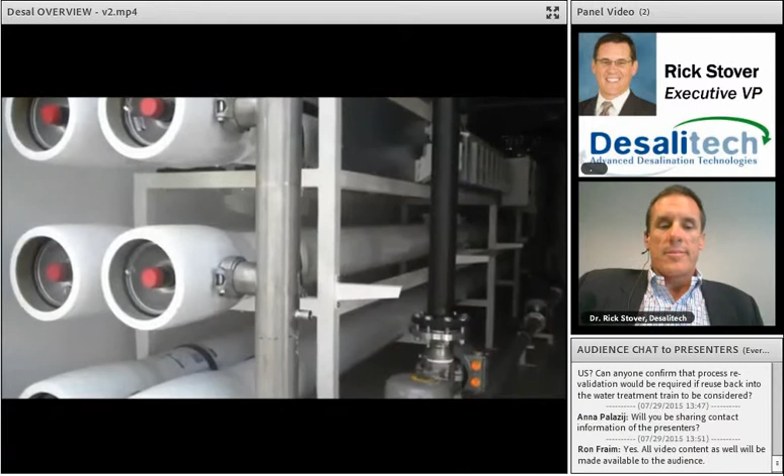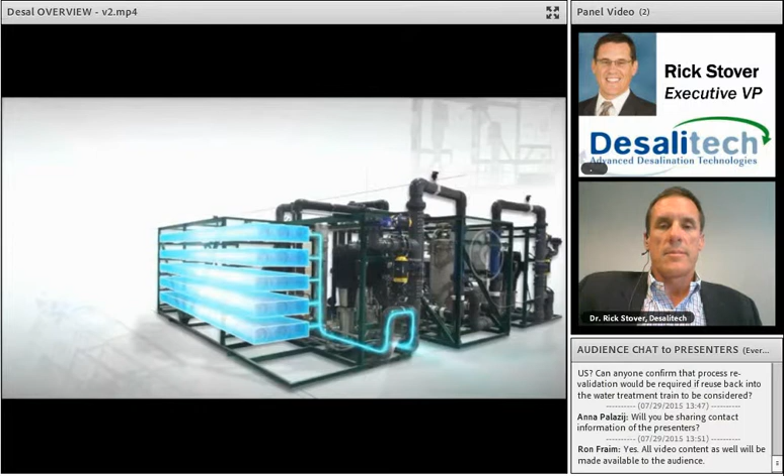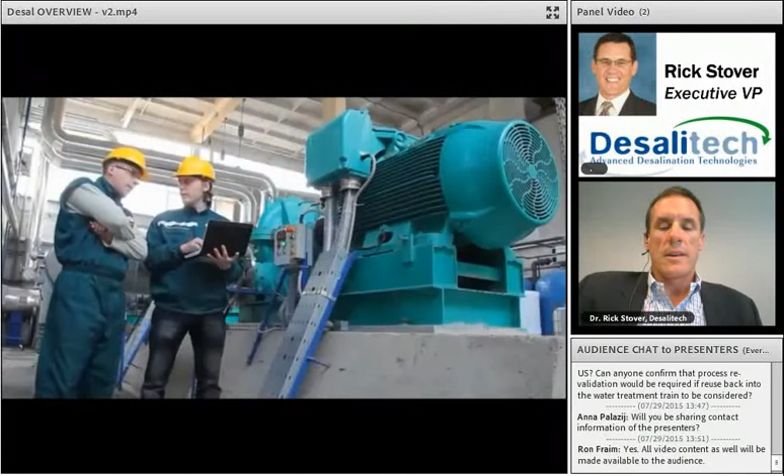Yesterday's technology cannot solve today's problems. Desalitech has the solution. Our ReFlex RO systems open a new era of water treatment efficiency. Thanks to our patented closed-circuit desalination, or CCD technology, ReFlex systems maximize the usefulness of water resources, reducing disposal costs by 50 to 75% and energy consumption by 35%. This is driving major operating cost savings and providing a return on investment within months while being environmentally responsible. Smart yet simple. ReFlex RO systems perform reliably around the globe. With our partners, we are solving water problems and achieving notable savings across multiple market sectors. Desalitech, leaders of high-efficiency water treatment and reuse.

Okay, I guess I'm back live now. Yes, you are. Terrific, thank you.

All right, so as the video talked about, the world is running out of water, and in terms of new water resources, it's desalination and reuse that are really the only viable new sources for water.

So if you look at the primary consumers of fresh water, the sectors, it's industry, domestic use, and agriculture, for the most part. And of those, in the developed world, like the United States, industry is by far the biggest consumer. 60% of freshwater withdrawals are by industry. That's expected to increase much more rapidly than domestic use is expected to increase. A factor of 5 on industrial consumption.

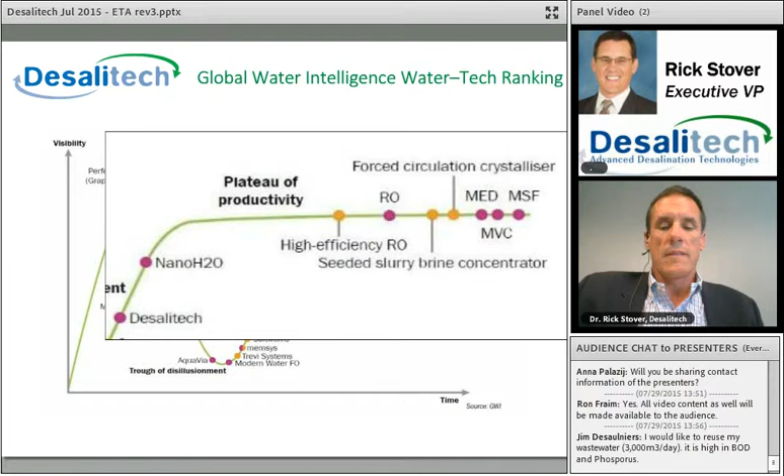So I'll zoom back out for a minute and then look at the steep part of the curve. These are essentially emerging technologies, emerging companies. And, trying like heck to advance my slide here. Here we go. And so what you see, Desalitech is shown on this as pretty advanced in terms of getting productive. It's due to the number of facilities that we have and how easily adoptable the process and the products are.

But I also want to point out that the other companies shown lower down on the curve there, most of them are in an orange color. And in this chart, what that means is that they're brine concentrator technologies. I'm going to get to in a second why it is that there's so many companies pursuing that. But first, most of these companies started out trying to be desalination and water reuse companies and shifted their business plans eventually.

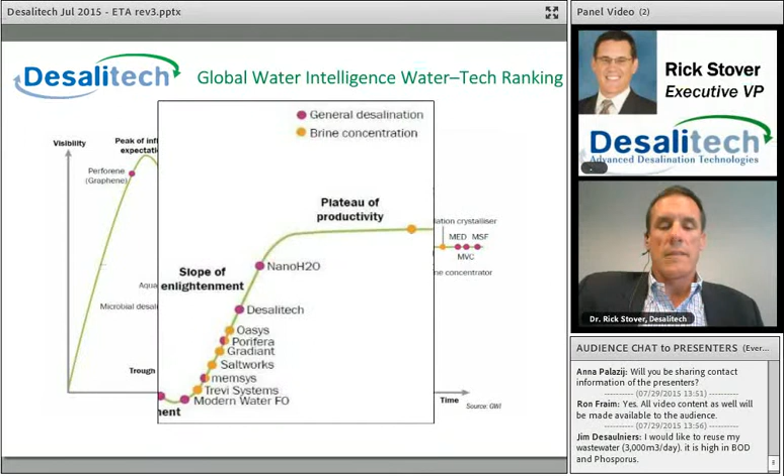And if you look back further on the curve here, you see a lot of the companies descending from the peak of inflated expectations to the trough of disillusionment are still trying to be desalination and water reuse technologies. So significant focus here on brine concentration, and what that really means is waste minimization.

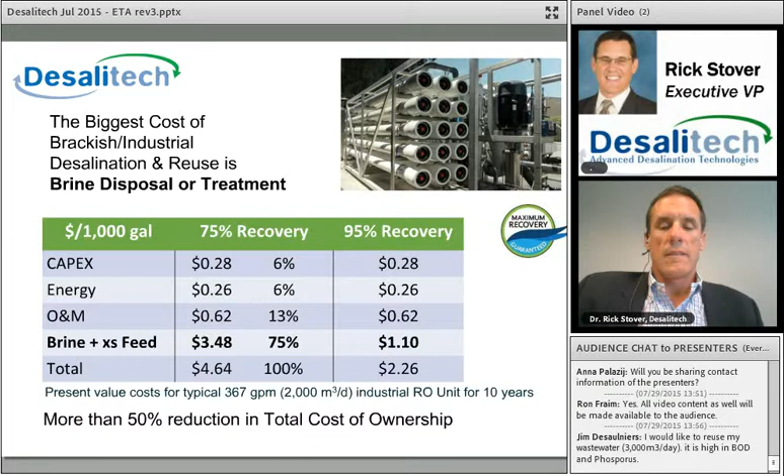If you can raise recovery from 75% to 95%, as shown in the right-hand column here, you can cut the cost of ownership to these systems in half. So that's why on the previous slide, so many companies were going after brine concentration and waste minimization. It really is the highest cost of ownership component in these types of RO treatment systems.

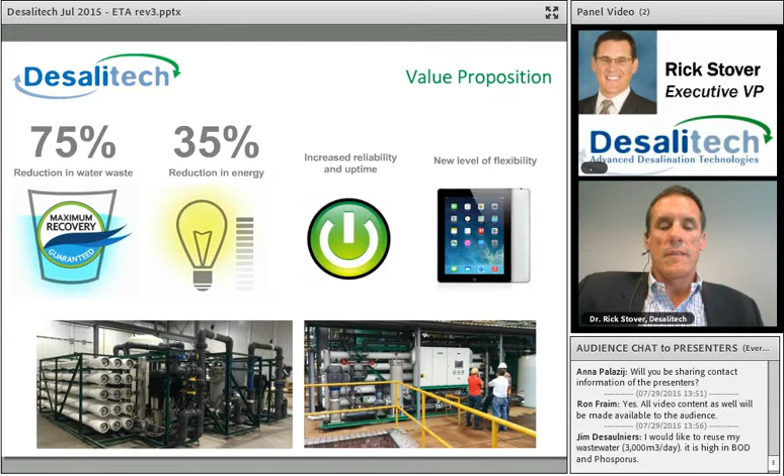So Desalitech's value proposition then is increased recovery and thereby a reduction in water waste. Our systems also consume less energy. This is especially important in seawater desalination applications, but also in brackish, industrial and water reuse applications. Our systems have increased uptime. They're more reliable, and they offer a level of flexibility that has not been known in reverse osmosis systems before. And I'll explain why that's the case as I move into the technology here.

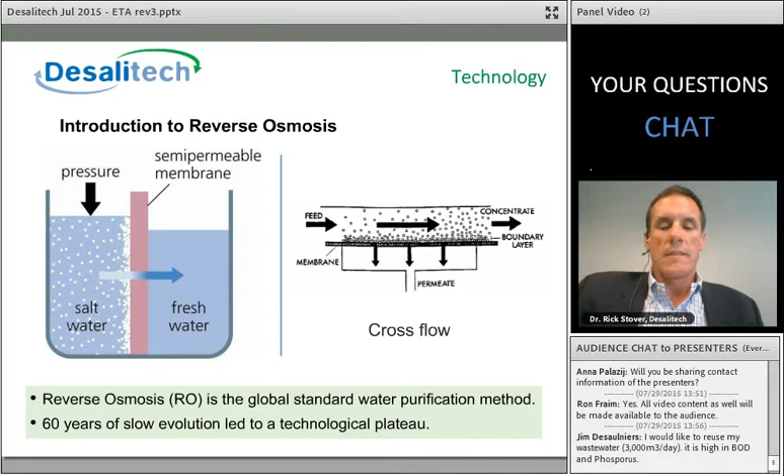Take a small step back and talk about what reverse osmosis is. If you put pressure on salt water and press water across a semi-permeable membrane, the salts are held back. If you release that pressure, water will flow back by virtue of the osmotic potential. So reverse osmosis is a pressurized process, but you can't do it in the way shown in the beaker on the left here. On the right is how it's actually applied in practice, and that's with cross flow. So pressure is applied, water permeates through the membrane, and then the sweep of feed and concentrate past the membrane surface takes salts away, or removes the concentration buildup on the surface.

And so this cross flow is essential to make RO membranes work. RO is really the workhorse for water purification. In Abigail's presentation, most of the water reuse schemes that she showed have a reverse osmosis component in them. And that's because if you have to do water purification, you want to do it with reverse osmosis. It's the most affordable and reliable way to go about it.

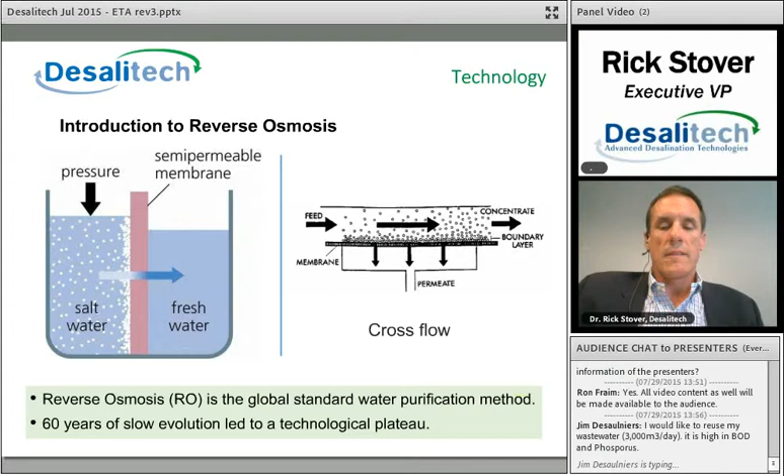However, modern reverse osmosis hasn't really evolved as a process in the 60 years or so that it's been used. It's really hit a technological plateau, until now.

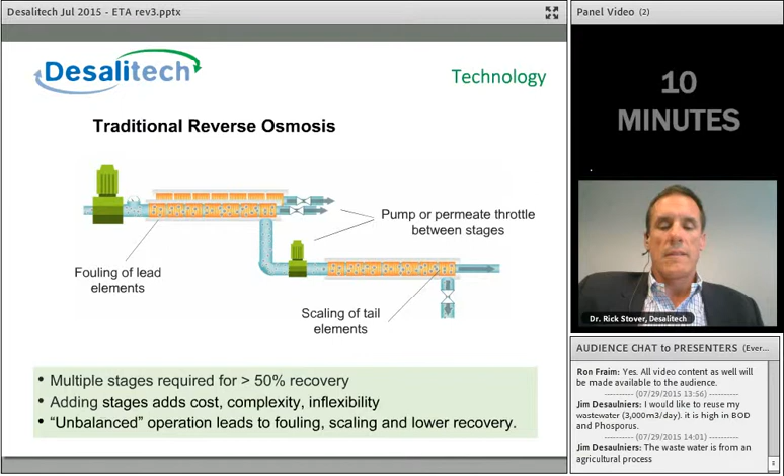So this shows how RO is done in practice. This is a traditional multi-stage reverse osmosis system. You need multiple stages to get to high recovery. But unfortunately, adding stages adds complexity and cost and inflexibility. And if the system gets out of balance, it's subject to fouling, scaling, and reduced recovery.

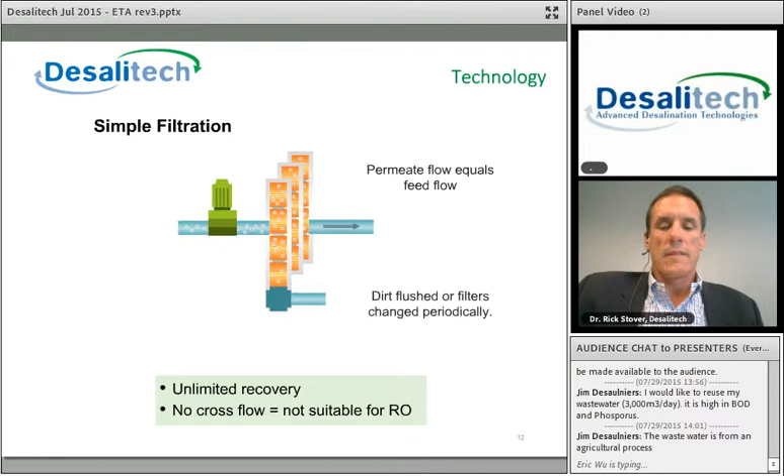Desalitech introduces this breakthrough really in the RO process, and that's what we call ReFlex RO. And really what it is is a combination of the last two technologies shown. There's a high pressure pump that feeds a single stage membrane array. Concentrate is returned to the membrane feed with a circulation pump. And then it continues like this without releasing any of the concentrate and producing the purified water stream.

Periodically, the brine valve opens and the salts and concentrate flush from the system. So it operates in two modes, closed circuit with 100% recovery, and then flushing mode, and the latter is about 10% of the time. With this process, we are able to achieve up to 98% recovery in a single stage. Basically, the longer you allow the concentrate to recirculate, the higher the recovery gets.

So that recovery rate is set at the control panel. So you can program the system to release the concentrate as soon as or as late as you like. And that flexibility in being able to adjust recovery at the control panel is a tremendous advantage from both a design standpoint and from an operation standpoint. The cross flow that you need for RO is done by the circulation pump, and that's adjustable as well.

And then finally, fouling and scaling of the membranes, which can be a problem, especially in water reuse applications, is limited by the good cross flow in these systems, and also the cycling of salinity from high to low disrupts biofouling.

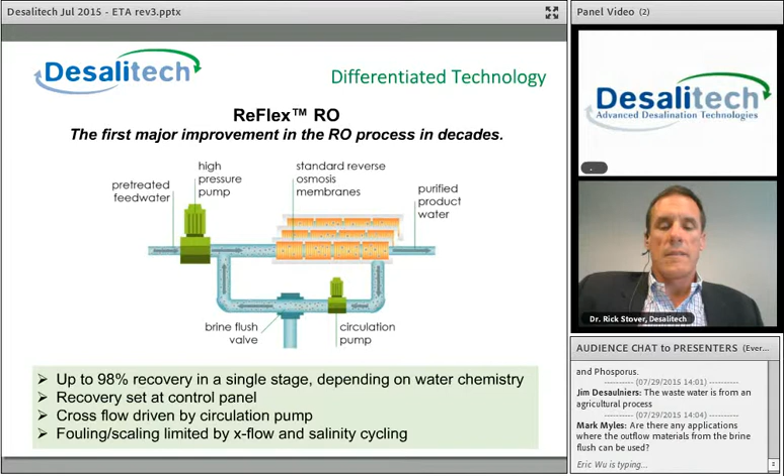Okay. Briefly about how this technology came about. It was actually developed by a professor of physical chemistry who had a vision for hydrostatic closed circuit pressurization, depressurization. It's more energy efficient. And then the batch-like operation allows for higher recovery. So those are really the goals. The first patent on this approach was issued in 2008.

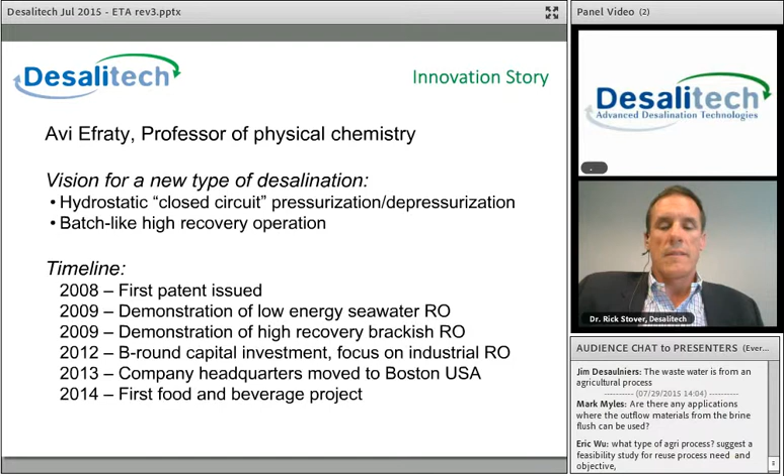And then finally, it was only in the last few years that the company moved to the United States, which is actually the biggest market for industrial and brackish water and reuse with reverse osmosis. Our company headquarters is in Boston. Our first food and beverage project was in 2014, and I'll talk about that project and some others in the next slide. I'm actually going to skip this case study in the interest of time and talk about these.

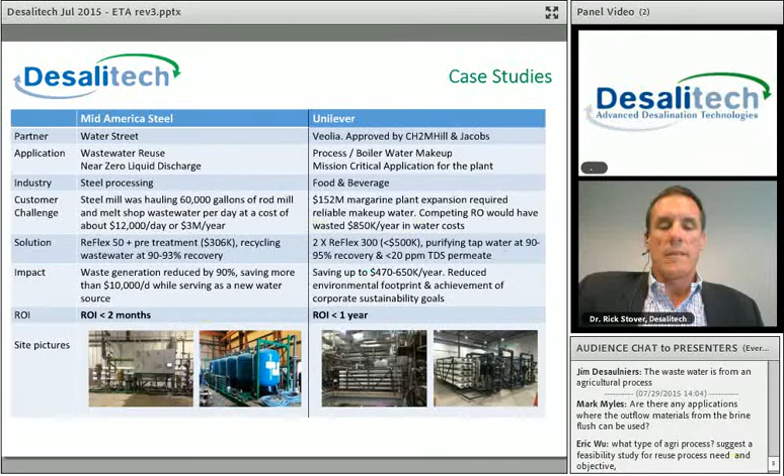So the one on the left is Mid America Steel. It's a water reuse project. It was a melt shop manufacturing site with very dirty cleaning water with a circulation loop. We are now recycling that water back into the plant for continued use and dramatically reducing the amount of water that had to be hauled off-site. About a 6-week ROI on that project just based on the reduction in waste generated.

The one on the right is a food and beverage plant. Again, by increasing the efficiency with which they were treating the water, raising recovery, and lowering the reject flow, that project enjoyed less than a 1-year ROI.

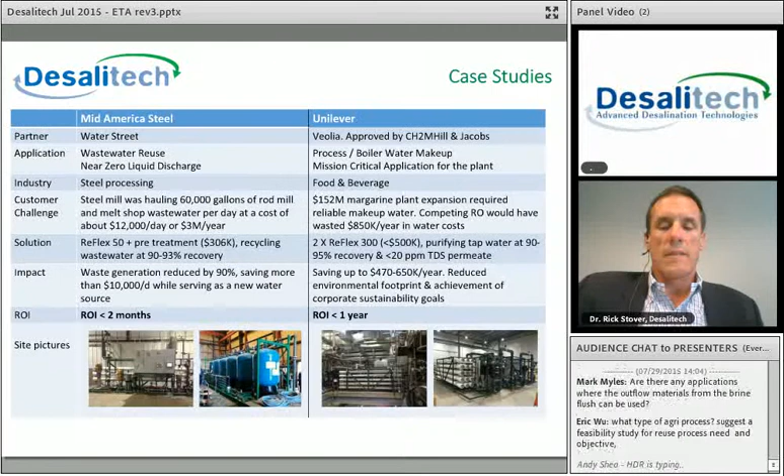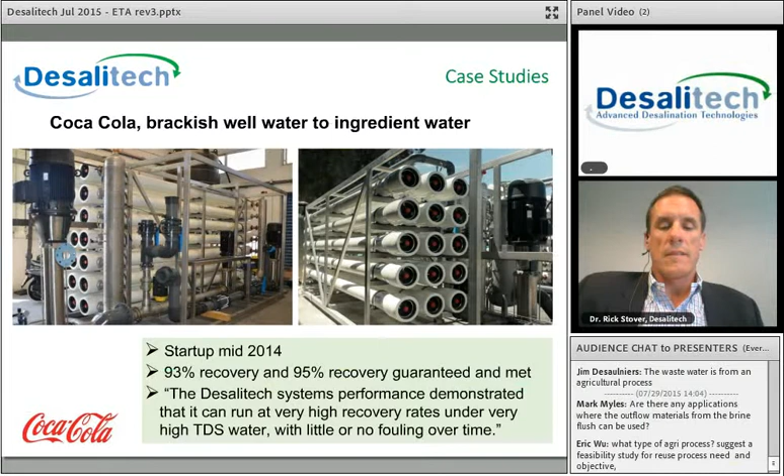So here's another project. It's with Coca-Cola. What we're doing here is taking brackish groundwater, taking the salt and minerals out of it, and using it for ingredient water in Coca-Cola products. These are 2 systems you see in the pictures here. One of them operates at a guaranteed recovery rate of 93%, and the other at 95%. And both of these have been operating since last year.

High recovery is essential to minimize the amount of reject. Downstream processing of the reject brine can be expensive, so our operation here minimizes the amount of that stream, and then it can be handled efficiently downstream.

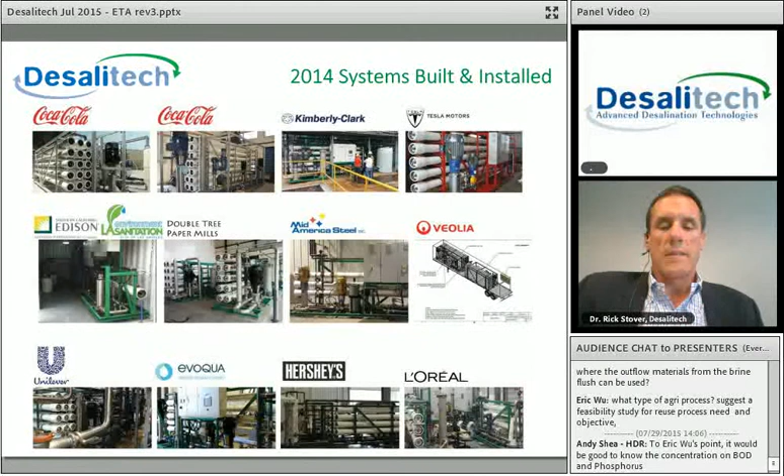So Mid America Steel I talked about, another water reuse project. Hershey's is a wastewater treatment project, also in the food and beverage sector. And I wanted to mention that our experience with water reuse has led to us being specified for a project with the City of Los Angeles, another water reuse project like the LA Sanitation District project. So these systems work very well for water reuse, and it's primarily because of the fouling resistance and high recovery rate.

All right, so turning to potentially your application and understanding whether it's worth it to implement a Desalitech system. If you can raise recovery on your RO process from 75 to 94% recovery, which is typically the value proposition that Desalitech brings, you can enjoy less than a 3-year ROI, even if your cost of water is only $2 per 1,000 gallons.

The average cost for commercial water supply and wastewater treatment is about $13 per 1,000 gallons. So even if you're a tiny fraction of the average cost in the U.S., you'll get a less than 3-year ROI with higher recovery RO.

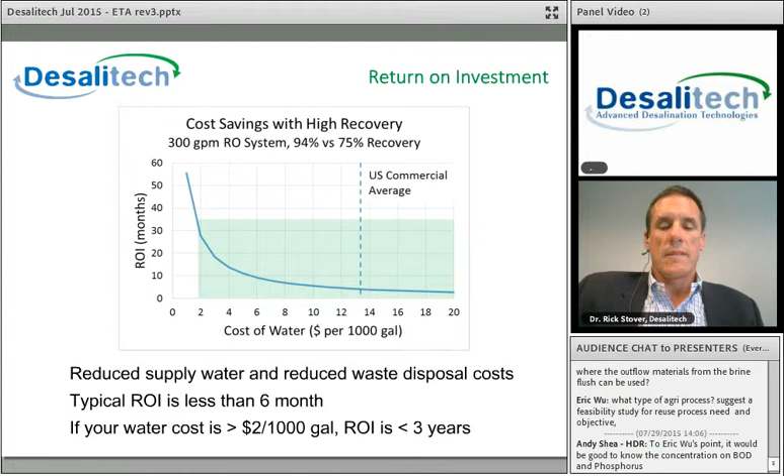So Desalitech's value proposition, again, high recovery, along with that fouling and scaling resistance. Our systems are built out of standard reverse osmosis components. Our innovation is putting those components together in a new way. And finally, as a new company, or really as any company in this space, we offer excellent customer service, and that includes being able to remotely monitor and control our systems.

So let's work together. The way we go about designing and implementing projects is first, we get your water analysis. So give us an analysis of the composition of your water. With that, we can do a design and cost it out and give you a guaranteed performance on recovery rate and on energy consumption.

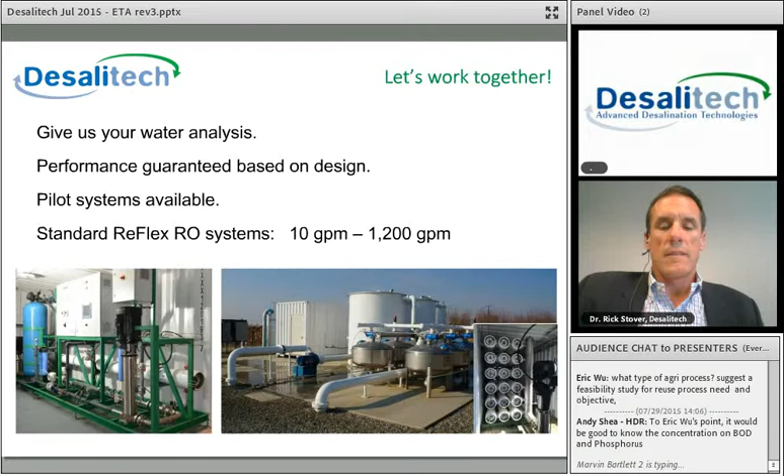We do pilot systems, although generally speaking, it's not necessary to pilot an RO system. They work according to their design, and this is pretty standard across the industry. Nevertheless, we do have pilot systems available. We have a standard product line of RO systems from 10 gallons a minute up to 1,200 gallons a minute. If you check Desalitech's website, you can see a listing of those products and services.